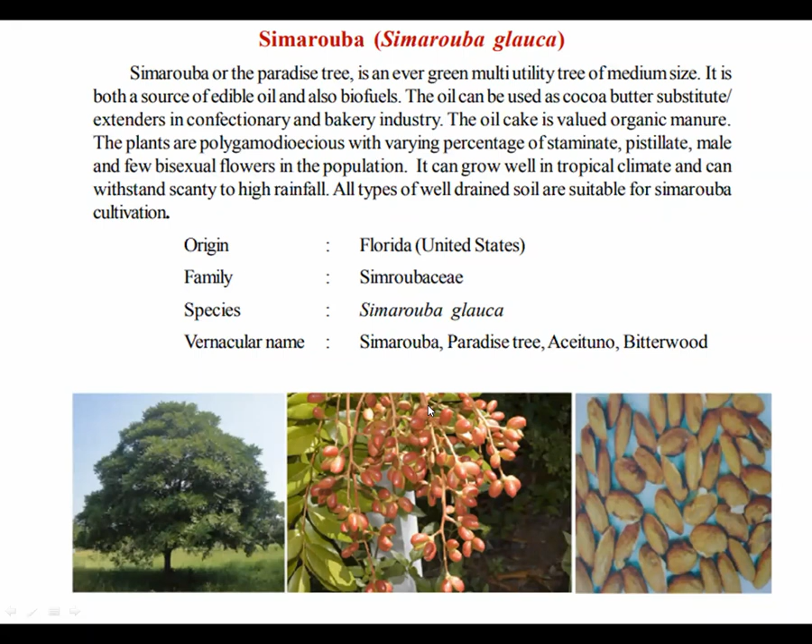Next is the Mahua, one of the important tree species in Central India, as it produces abundant delicious and nutritive flowers. This is used for edible purpose, either fresh or dried and stored for an indefinite period. It is fast growing, with a 20-meter height.

It is an evergreen tree cultivated in warm regions for its oil-rich seeds. Its oil is used by tribals as a vegetable butter. In addition, it is used in skincare products, soap, detergent, etc. It serves as an important fuel oil, hence a good source of biodiesel. The seed cake is used as manure. The flowers are used to produce an alcoholic drink in several parts of India.

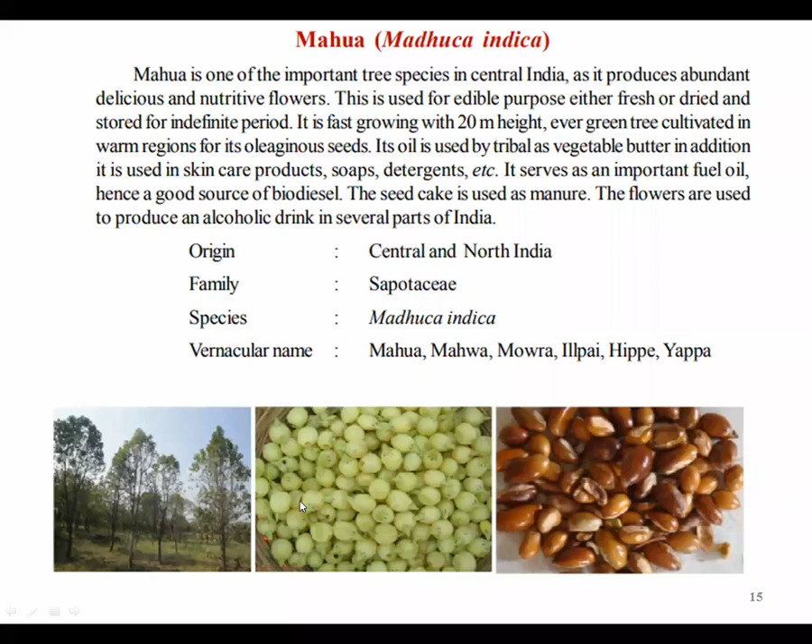Origin: Central and North India. Family: Sapotaceae. Species: Madhuca indica. Vernacular names: Mahua, Mowra, Illpai, Hippe in Kannada, and Yappa. And these are the trees, the fruits, and these are the seeds.

Kokum is an important minor fruit besides its seeds, which serve as an oil source for edible and non-edible applications. It is reported to have been imported from Zanzibar to India, and is found growing widely in the tropical rainforests of the Western Ghats in Konkan, Goa, Southern Karnataka, and Kerala. It is a slender, evergreen tree with drooping branches.

Kokum fruit is a promising industrial raw material for commercial exploitation due to its interesting chemical constituents. The seed yields a valuable edible fat known as kokum butter, used in chocolate and confectionery preparations, and also in manufacturing soap, candles, and ointments. It is an important source for biodiesel. Origin: Asia and Africa. Family: Clusioideae. Species: Garcinia indica. Vernacular name: Kokum.

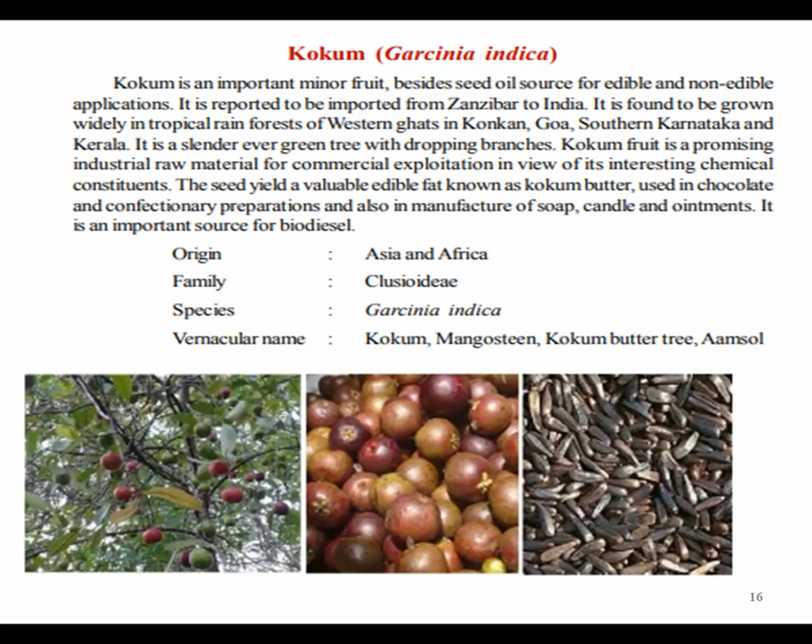This is the Aamsol kokum butter tree, and these are the tree's fruits, and these are the seeds.

Jojoba is also a tree, a potential tree-borne oilseed. It is grown in northern India, and its origin is North America. The family is Simmondsiaceae, species Simmondsia chinensis. Vernacular names include goat nut, coffee berry, quinine nut, wild hazel, and pig nut.

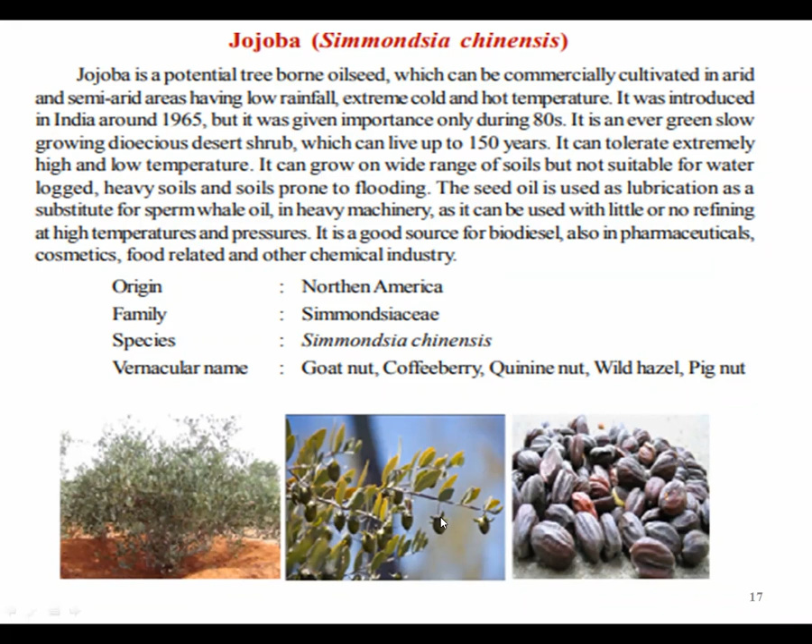This is the tree, and these are the fruits. The kernel has to be taken from this.

Neem is the most common in India; everyone knows it. It is one of the most valuable tree species found in India. It can grow on a wide range of soils, up to pH 10, making it suitable for every agro-climatic zone except high cold regions. It has a deep root system, so it does not compete with annual crops for soil moisture.

It is a multi-purpose tree which provides all the requirements of rural areas, namely timber, fuel wood, fodder, oil, fertilizer, pest repellents, etc. Neem is known for its azadirachtin content, and it has been commercially exploited in many products like medicine, manure, pesticide, insecticide, etc. Neem is also regarded for its environmental values.

Origin: India. Family: Meliaceae. Species: Azadirachta indica. Vernacular names: Neem, Bevu, Tamaka, Tamabin, Margosa tree, Veppu, Nimba, and others. And these are the trees, and these are the fruits and the seed kernel.

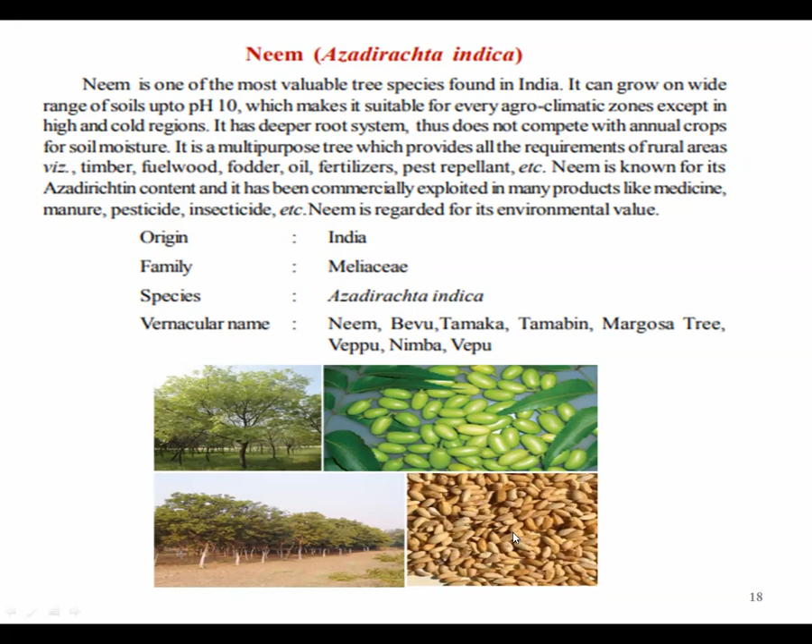Vegetable oils are the oils taken from all these seeds. Generally, these oils are removed from the kernels, sometimes with the shell and sometimes without, and they are crushed and put in the expeller, where with high pressure the oil is removed. Those are called vegetable oils. Next, properties of vegetable oils.

Vegetable oils and fats are hydrophobic substances composed of fatty esters and glycerol, known as triglycerides. Carbon chain length and number of unsaturated bonds varies. Triglyceride has a molecular weight of 800 to 900, 4 times larger than typical diesel.

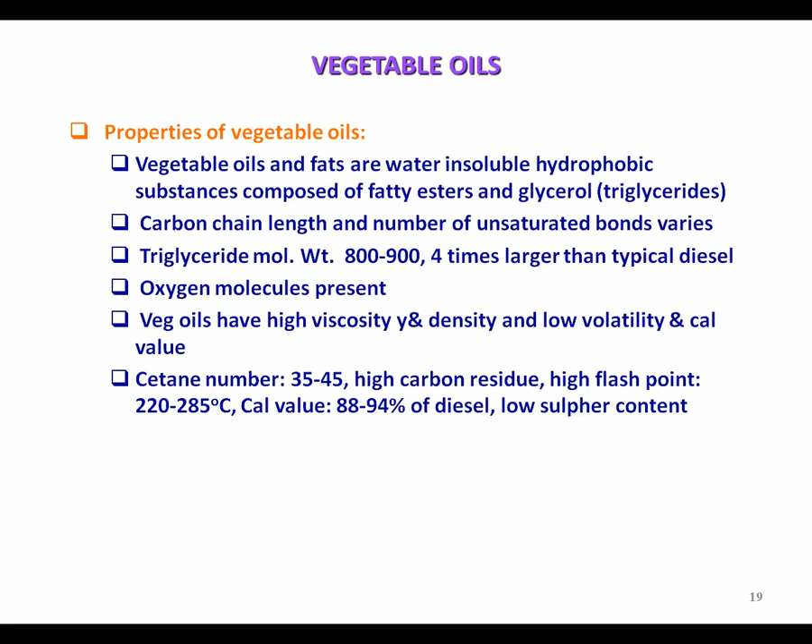Oxygen molecules are present in these vegetable oils. Vegetable oils have high viscosity and density, and low volatility and calorific value. Cetane number ranges from 35 to 45, with high carbon residue, high flash point of 220 to 285 degrees Celsius.

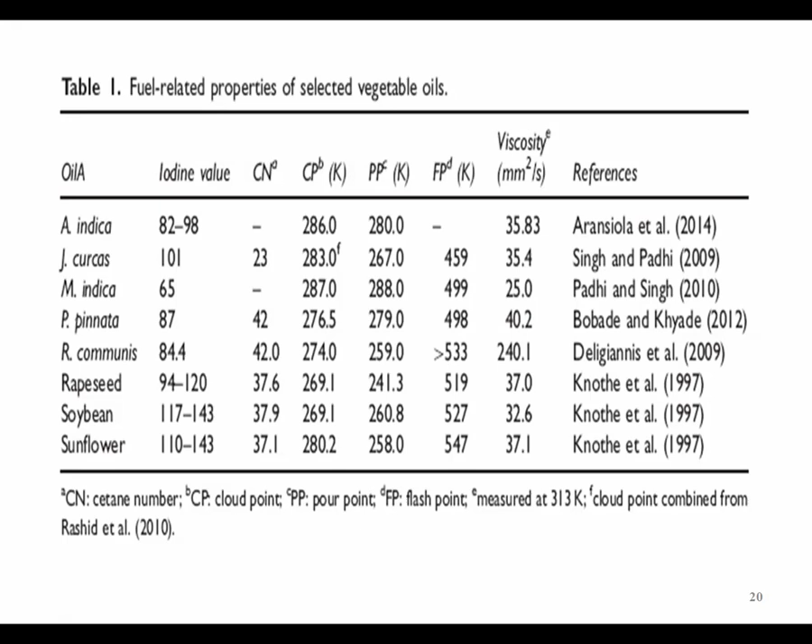If the free fatty acid content is 0, then it does not have the property of converting this vegetable oil into biodiesel. The more fatty acid composition it has, the more ability it has to convert into biodiesel. This is why it is significant.

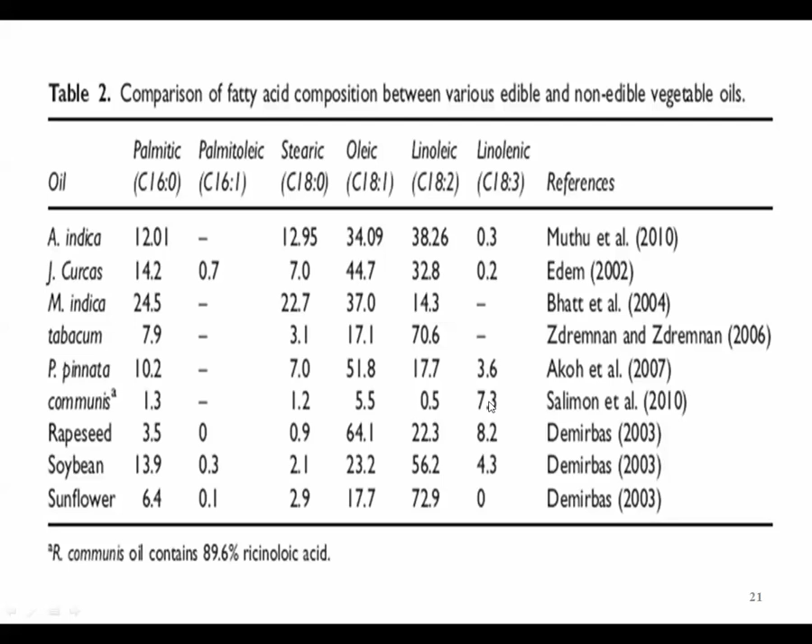Castor especially. The oil content in seeds and kernels of some non-edible plants.

Azadirachta indica, the neem tree, percentage of weight in the seed kernel - these are references. Oil content by weight percentage in the seed is 25 to 45, and in the kernel it's 30 to 50%. For polonga, it's 60 to 75, 50 to 70, and similarly for rubber.

You can see Madhuca indica and Jatropha have maximum oil content in the seed kernel, and the seed put together has an average of 30 percent of oils.

We can see mahua, drumstick, tobacco, karanja, castor, soap nut, jojoba, and all these are listed with their oil content in percentage by weight.

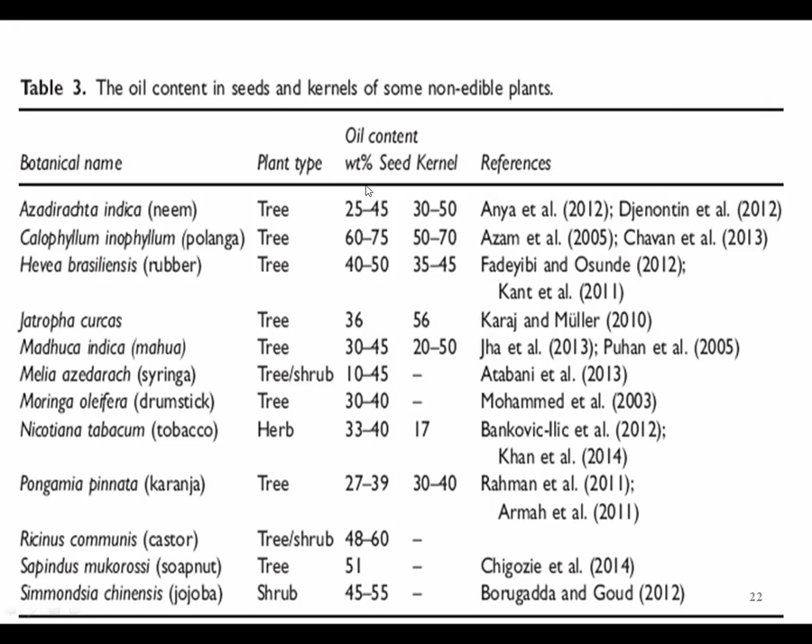The yields of various non-edible oil feedstocks. Neem yields 2,670 kg per hectare. These are seeds, talking of polonga, cardoon, rubber, and jatropha.

Drumstick, tobacco, karanja, castor, jojoba, tung, and for all these given here, among them polonga is 4,680, and karanja is of the order of 900 to 9,000 kgs per hectare. Note that 1 hectare is equal to nearly 2.2 to 2.5 acres.

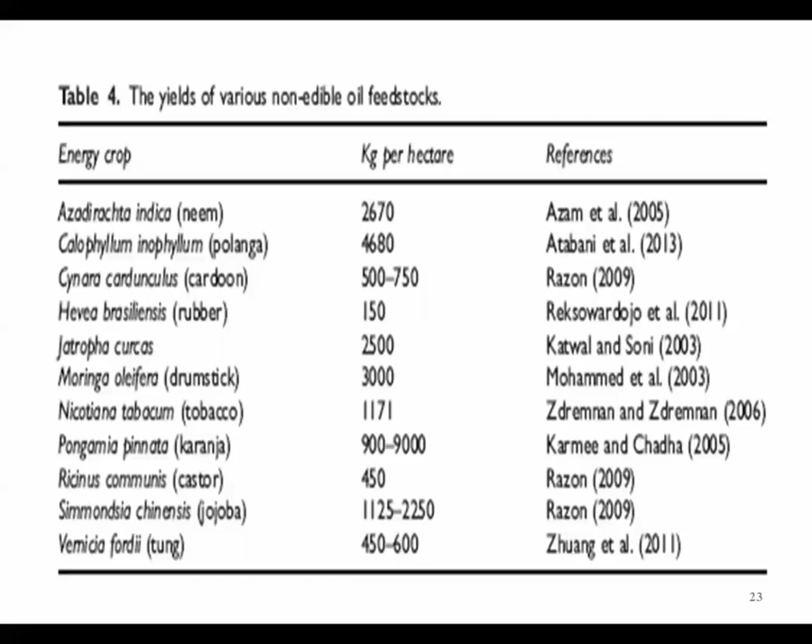Derivatives of non-edible oils as diesel fuels. Non-edible vegetable oils can be used as the fuels for diesel engines.

The primary problems associated with using these oils straight as alternative fuel in compression ignition engines are caused by very high fuel viscosity and low volatility. This leads to incomplete and improper combustion in combustion chambers. Either we have to modify the combustion chambers to suit this, or we have to modify the fuel.

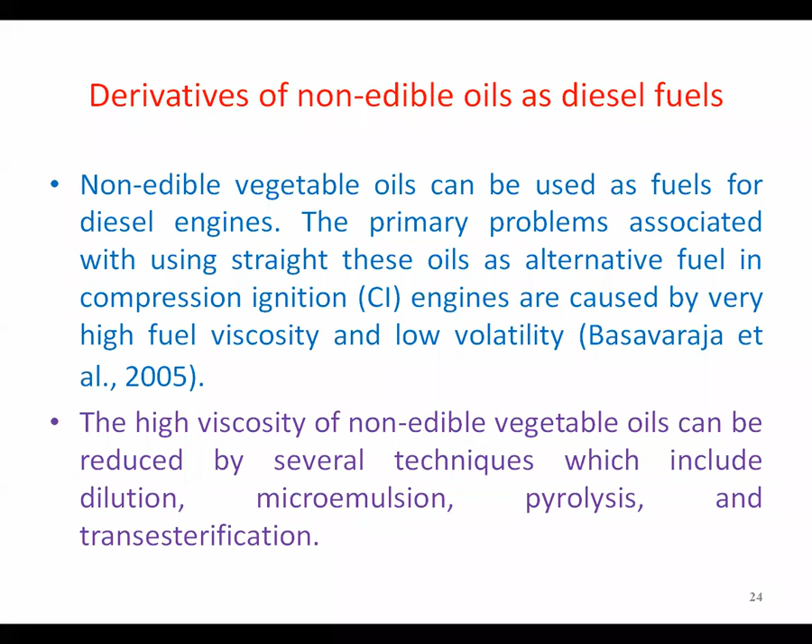The high viscosity of non-edible vegetable oils can be reduced by several techniques, which include dilution, microemulsion, pyrolysis, and transesterification. These are the different techniques of reducing viscosity of non-edible vegetable oils.

The first one is dilution of non-edible vegetable oils. Dilution means taking diesel and mixing 10% or 20% of the vegetable oil directly with the diesel. This dilutes the vegetable oil, and hardly there is a change in the properties of the diesel.

The oil-diesel fuel blend is a simple way to reduce the viscosity of non-edible vegetable oil. This method does not require any chemical process; just mixing is all that needs to be done.

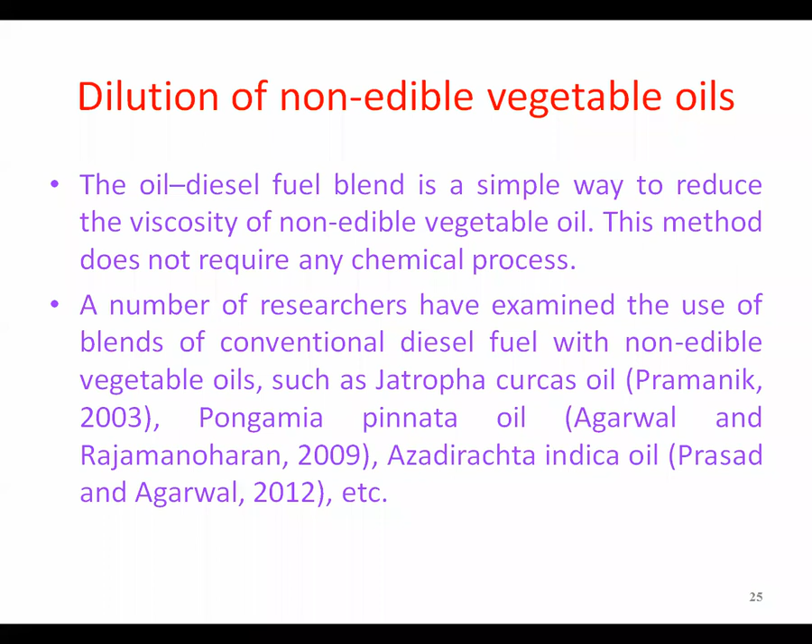A number of researchers have examined the use of blends of conventional diesel fuel with non-edible vegetable oils such as jatropha, karanja oil, Pongamia pinnata oil, and azadirachta indica oil, etc.

Using microemulsions for non-edible vegetable oils. Microemulsions are transparent, thermodynamically stable colloidal dispersions in which the diameter of the dispersed phase particles is less than one-quarter of the wavelength of visible light.

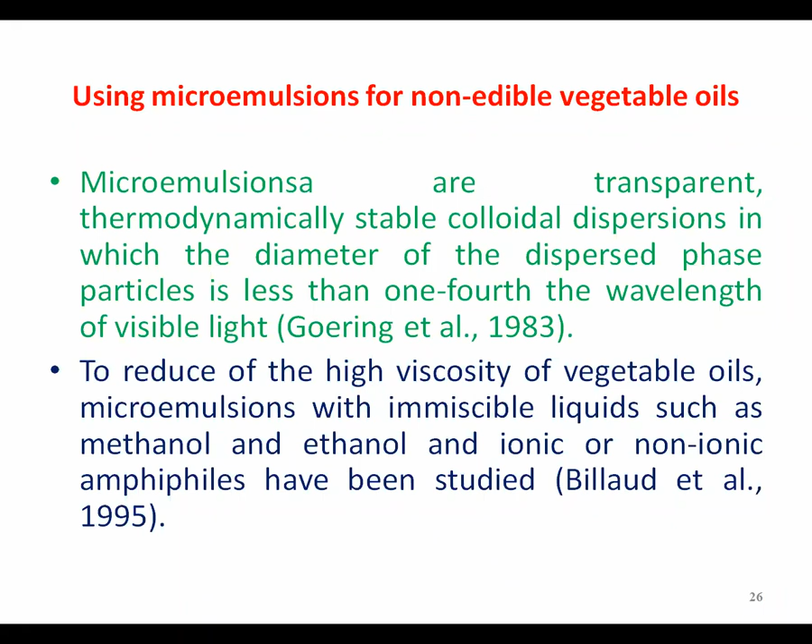To reduce the viscosity of vegetable oils, microemulsions with immiscible liquids such as methanol and ethanol, and ionic or non-ionic amphiphiles, have been studied. They take the vegetable oil and the methanol or ethanol and mix them thoroughly. This forms an emulsion, called a microemulsion.

Liquid fuels and biodiesel from non-edible vegetable oils via pyrolysis. Pyrolysis is a process of heating the oil to a certain temperature, breaking the constituent molecules, and removing fatty acids from it.

Conversion of vegetable oils using pyrolysis type reactions presents a promising option for the production of biodiesel fuel. Pyrolysis is the conversion of one substance into another by means of heat, or by heat with the aid of a catalyst.

Thermal decomposition of the triglycerides produces compounds of the classes including alkenes, alkadienes, aromatics, and carboxylic acids. Different types of vegetable oils produce large differences in the composition of thermally decomposed oil.

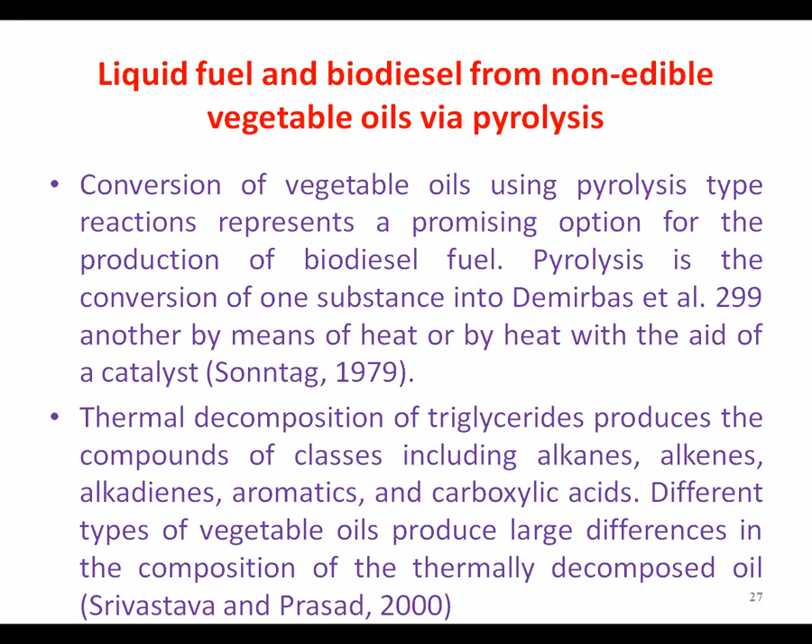Biodiesel via transesterification from non-edible vegetable oils. This is one of the most popular methods of producing biodiesel. Transesterification is a chemical reaction between a triglyceride and an alcohol.

Most commonly methanol or ethanol, in the presence of a catalyst, consists of a sequence of three consecutive reversible reactions where triglycerides are converted into diglycerides, and then diglycerides are converted into monoglycerides, followed by the conversion of monoglycerides to glycerol. In each step, an ester is produced, and thus three ester molecules are produced from one molecule of triglyceride. If one molecule of triglyceride is taken up, three molecules of ester are produced - that is, the biodiesel.

Ethanol is the preferred alcohol in the transesterification process compared to methanol because it is derived from agricultural products, is renewable, and is biologically less objectionable in the environment. However, methanol is preferable because of its low cost and its physical and chemical advantages as a polar and the shortest chain alcohol.

Triglycerides are esters of long chain carboxylic acids combined with glycerol. The carboxylic acid, R-COOH, can be converted into the methyl ester by the action of a transesterification agent.

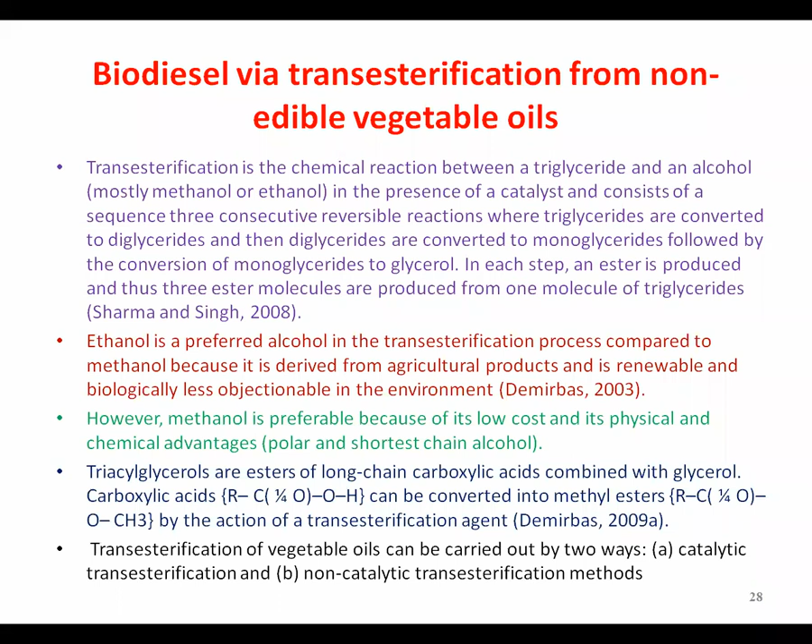Catalytic transesterification method: in this one, one mole of vegetable oil and three moles of alcohol are taken and heated at around 60 to 65 degrees Celsius for about 1 to 1.5 hours, depending on the free fatty acid content in the oil, along with a catalyst. This is called the catalytic transesterification method.

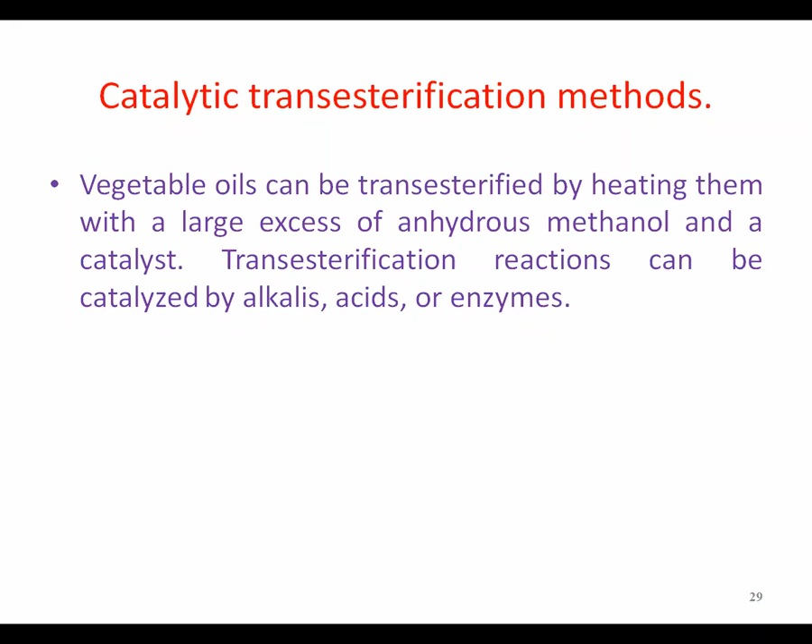Vegetable oils can be transesterified by heating them with a large excess of anhydrous methanol and a catalyst. Transesterification reactions can be catalyzed by the use of alkalis, acids, and enzymes.

Comparison of various methanolic transesterification methods: in the acid or alkali catalytic process, the reaction temperature is of the order of 303 to 338 Kelvin, and the reaction time taken is from 60 to 360 minutes.

Boron trifluoride, methanol, sodium methoxide catalyzed, non-catalytic supercritical methanol, and catalytic supercritical methanol methods. For the first three, reaction temperature is of the order of 300, while for others it is 523 to 573. Reaction time reduces for supercritical methanol to 6 to 12 minutes, and for catalytic supercritical methanol it is 0.5 to 1.5 minutes, meaning conversion becomes much easier with the supercritical methanol process.

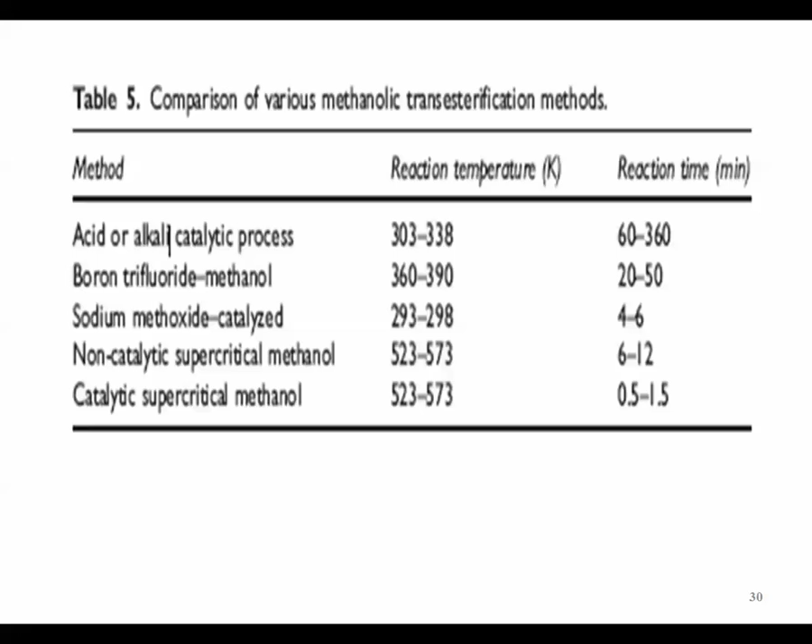Because this is a continuous process, we can do it, but with catalytic methods we cannot do it continuously—it takes nearly 1.5 to 2 hours for conversion.

Non-catalytic transesterification methods: there are two basic routes to produce biodiesel by non-catalyzed transesterification—the BIOX co-solvent process and the supercritical alcohol process. BIOX is named after the scientist who invented this process, where oil is converted to biodiesel using a co-solvent.

The BIOX co-solvent process uses either tetrahydrofuran (THF) or methyl tert-butyl ether as a co-solvent to generate a one-phase system. The result is a fast reaction, on the order of 5 minutes, with no catalytic residues in either the ester or glycerol phase. THF co-solvent is chosen partly because its boiling point is close to that of methanol, and this system requires a relatively low operating temperature.

For the majority of laboratory cases, the catalytic type is used instead of the non-catalytic type. We use a 1.5 to 2 liter flask with a three-way mouth, and a glass vessel where we put all the constituents and apply heat. For laboratory purposes, this is the most suitable way of making biodiesel.

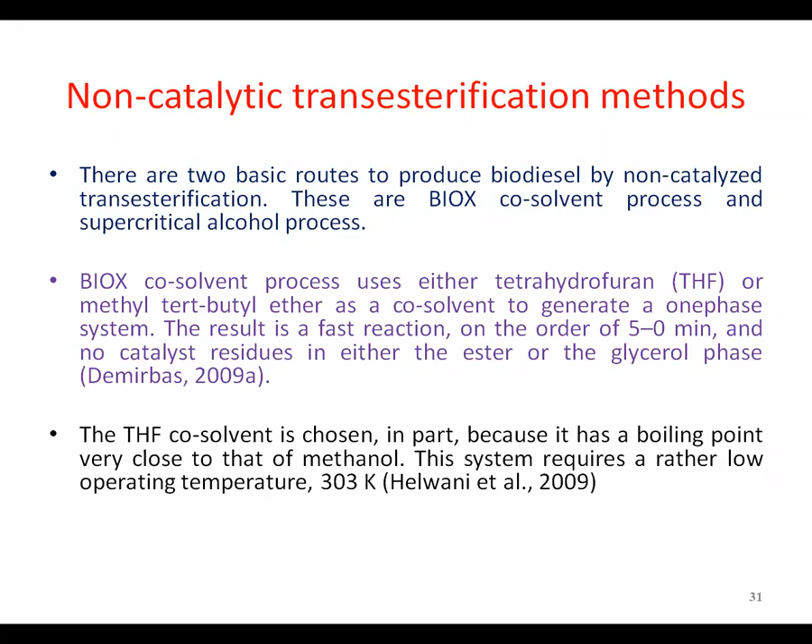Summary of catalytic transesterification of some selected non-edible oils. Catalysts used include potassium hydroxide (KOH), sodium hydroxide, pretreatment acid, Pseudomonas cepacia, CH3ONa, pretreatment, HCl, NaOCH3, KOH, and others, applied to non-edible oils like castor, karanja, and jatropha, each combined with a respective catalyst. The percentage of catalyst ranges from about 1 to 1.5%, except for the last case, and the temperature ranges are 333, 338, 338.

We heat it at this temperature, for example with castor oil and 1.5% KOH. Reaction times are 10 minutes, 3 hours, 1 hour, and 1 hour. Percentage yield of biodiesel is shown as 80.1%, 97%, 97.6%, and 98%, which are very good yields. This is why the catalytic transesterification process is most preferred in laboratories.

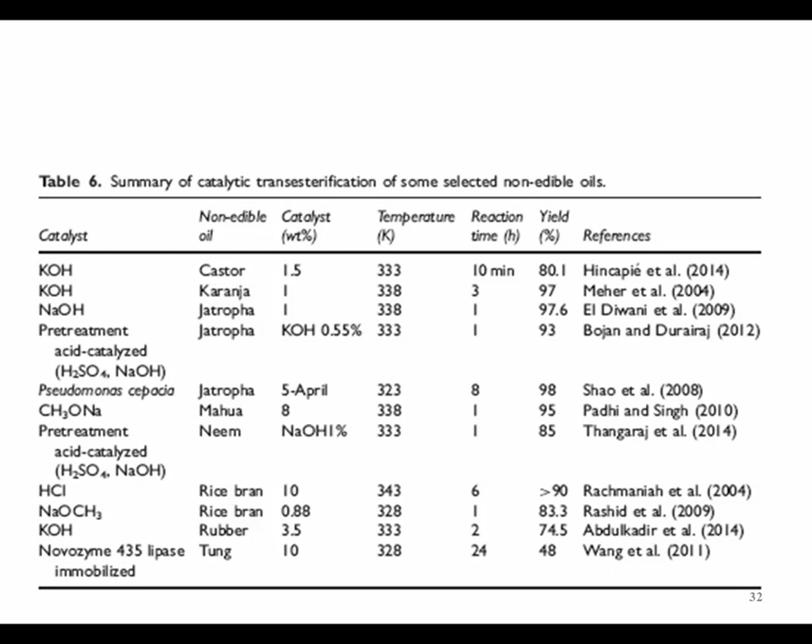Comparison between the catalytic methanol method and the SCM (supercritical methanol) method for producing biodiesel from vegetable oils by transesterification. Methylating agent is methanol in both; catalyst is alkali—NaOH or KOH—for catalytic method, none for SCM. Reaction temperature is 303 to 338 versus 523 to 573. Reaction pressure is 0.1 megapascal versus 10 to 25. Reaction time is 60 to 360 minutes versus 7 to 15 minutes. Methyl ester yield is 96% versus 98%. For purification, removal includes methanol, catalyst, glycerol, and soaps in the catalytic method, versus methanol, methyl esters, free fatty acids, methyl esters and saponified products, and water in SCM. Smell differs too—soap smell from exhaust versus sweet smelling.

This is the comparison with respect to temperature, pressure, time, yield, and catalyst used between catalytic and supercritical methods. Among them, the supercritical method is most important, because if you put vegetable oil directly in a vehicle system, biodiesel must be available in the form of continuous supply.

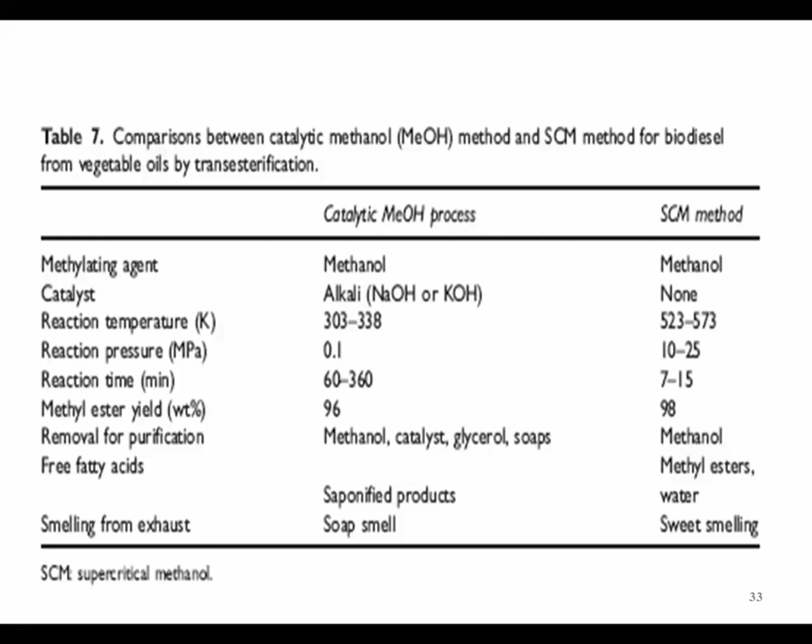ASTM standards specify maximum allowed quantities in diesel and biodiesel. Standard diesel is ASTM D975, and biodiesel is ASTM D6751. If interested, you can refer to these ASTM standards—D975 for diesel and D6751 for biodiesel. Composition includes HC C10 to C21, and FAME C12 to C22, with kinematic viscosity measured in millimeters squared per second.

The viscosity at 313 Kelvin is 1.9 to 4.1 centistokes, actually up to 6. Specific gravity is 0.85 to 0.88. Flash point values are 333, 353, 373, 443.

You can see that the flash point temperature of the biodiesel is even higher than given in the standards, meaning more flash point. The cloud point is 258, 278, of the same order.

Pour point is 238, 258, 258, 289, and water percentage is 0.05, 0.05, the same quantity. Carbon content is 87, 77, less in the biodiesel.

Hydrogen is about 13, 12 - this is from the ultimate analysis given. Oxygen is 0% in diesel versus 11% in the biodiesel.

This oxygen quantity is very important in the combustion process, because along with the biodiesel, this oxygen is available in the form of the oil itself. Inbuilt oxygen is available in the fuel by 10 to 11%, and the reaction becomes very fast. The catching of fire, the beginning of combustion, takes much quicker than diesel at the beginning, because inbuilt oxygen is available in the fuel.

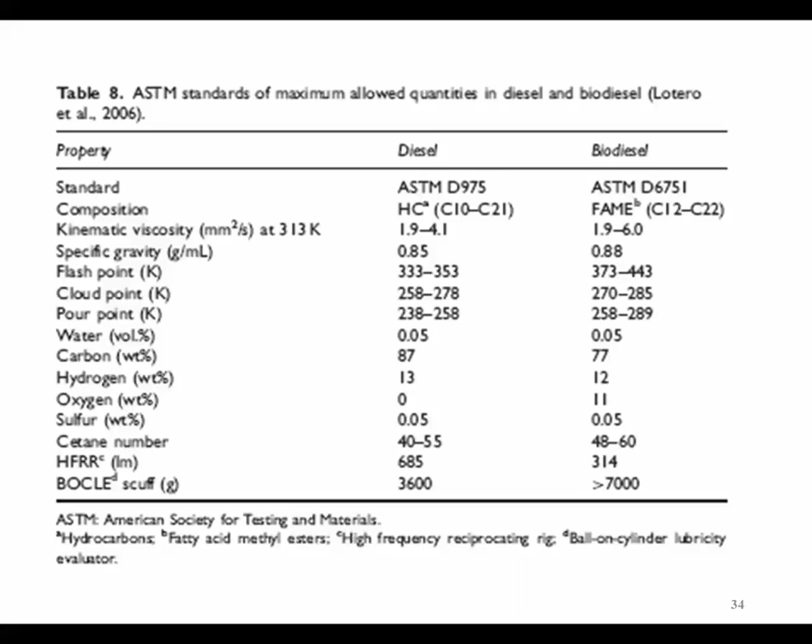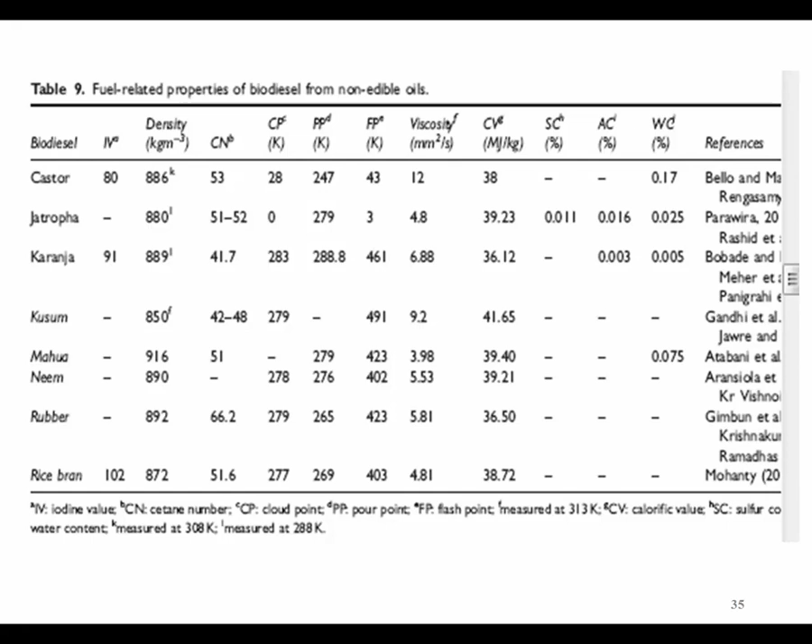After that, upgradation of the fuel property takes place. Fuel property upgradation is number one - the upgradation itself is in viscosity. The viscosity comes very close to that of diesel, making it possible to use biodiesel directly in combustion chambers.

Now so far this is a review of the literature we have done. In our college, we have a wonderful laboratory for internal combustion engines and biofuels, where we conduct a lot of experiments. One of the experiments I conducted, I want to present the values for the young participants.

For the experimental work, we used the following engine specification: Kirloskar AV1 engine, 4-stroke compression ignition, constant speed, vertical water cooled, naturally aspirated diesel engine, single cylinder, bore 80 mm dia, stroke 110 mm, swept volume 533 cc, compression ratio 16.5, rated output 3.68 kilowatt at 1500 rpm.

This is a 5 HP engine. Injection nozzle: MICO-BOSCH 3-hole nozzle, fuel injection pressure 150 bar absolute, injection timing 27 degrees before top dead center. Combustion chamber: hemispherical open combustion chamber. Inlet valve opens at 4.5 degrees before TDC, closes at 35.5 degrees after TDC. Exhaust valve opens 35.5 degrees before TDC, closes 4.5 degrees after TDC.

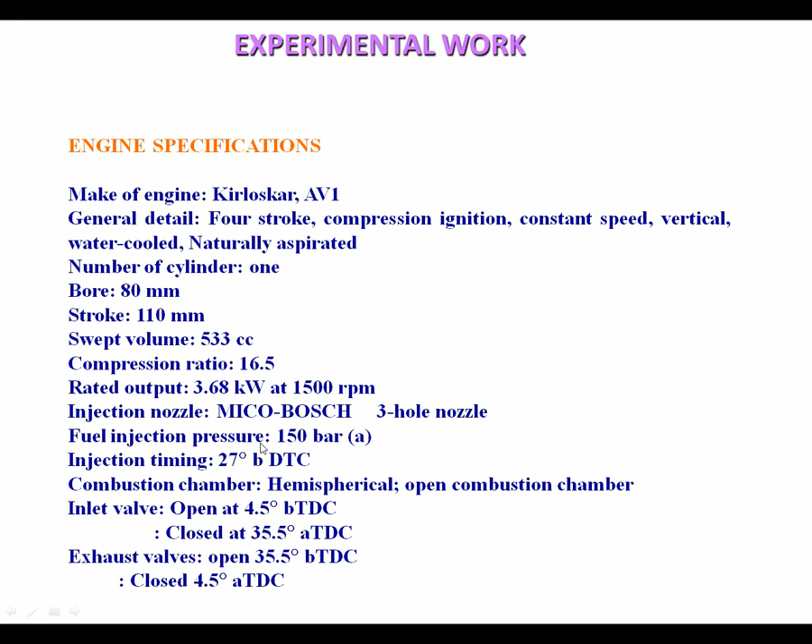Dynamometer: SAJ Froude AG series eddy current dynamometer, bidirectional, water cooled, with a load cell for torque and a magnetic pickup for speed measurement. Smoke meter: Neptune Equipment Private Limited, Ahmedabad make, measuring light absorption by particles in Bosch units. Exhaust gas analyzer: SAJ Crypton make, dry basis, non-dispersive infrared gas, measuring unburnt hydrocarbon and carbon monoxide.

We conducted this experiment around the year 2005, when these instruments were available. Now the exhaust gas analyzer in our laboratory has been well modified, and we purchased it at a cost of 15 lakhs.

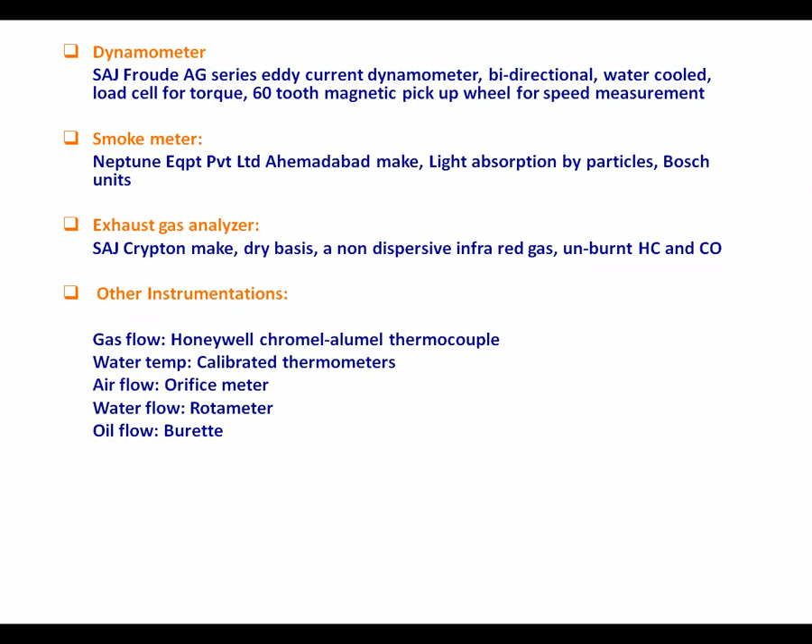We have also presented an AVL 5 gas analyzer. Other instrumentation includes gas flow, water temperature, air flow, water flow, and oil flow measurements, using thermocouples, orifice meter, rotameter, and burette, etc.

Experimental program: variable load tests are conducted at 0.37, 0.92, 1.48, 2.03, 2.58, 3.13, and 3.68 kilowatt at 1500 rpm, with injector pressure 150 bar and water outlet temperature of 60 degrees Celsius. Oil and its blends are heated to the required temperature because heating reduces the viscosity of the oil. The engine was sufficiently warmed up and stabilized before taking all readings.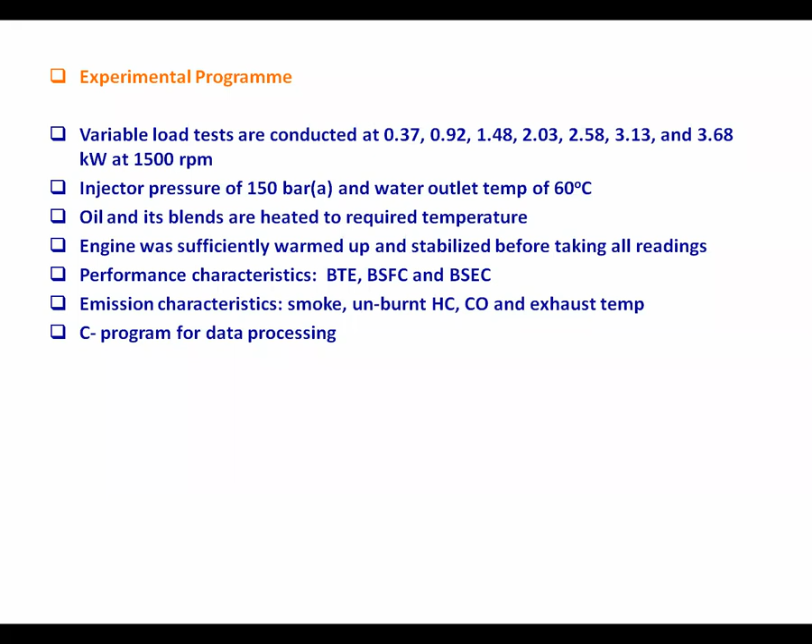Performance characteristics studied: brake thermal efficiency, brake specific fuel consumption, and brake specific energy consumption. Emission characteristics studied in terms of smoke, unburnt hydrocarbon, carbon monoxide, and exhaust temperature, with C programming used for data processing.

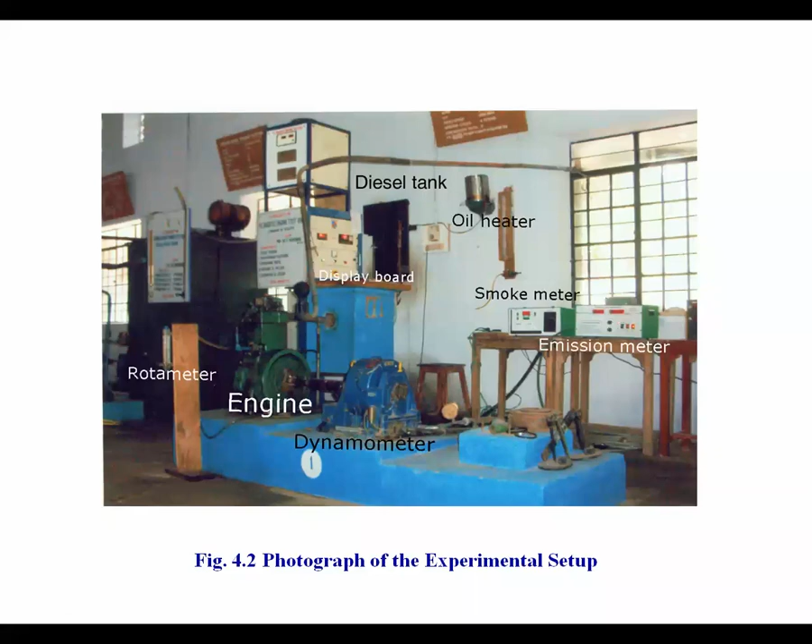Now at present we have this test engine, which is not 3.8 but 7.5 HP, and within it we have a 5 gas analyzer. This is a close view of the 5 gas analyzer, and the whole setup is available in our laboratory.

If any young scientist wants to work and conduct experiments on this IC engine, single cylinder or multi-cylinder, you can contact the Head of the Department of Mechanical Engineering. It is most useful for them for conducting R&D activities in our laboratory.

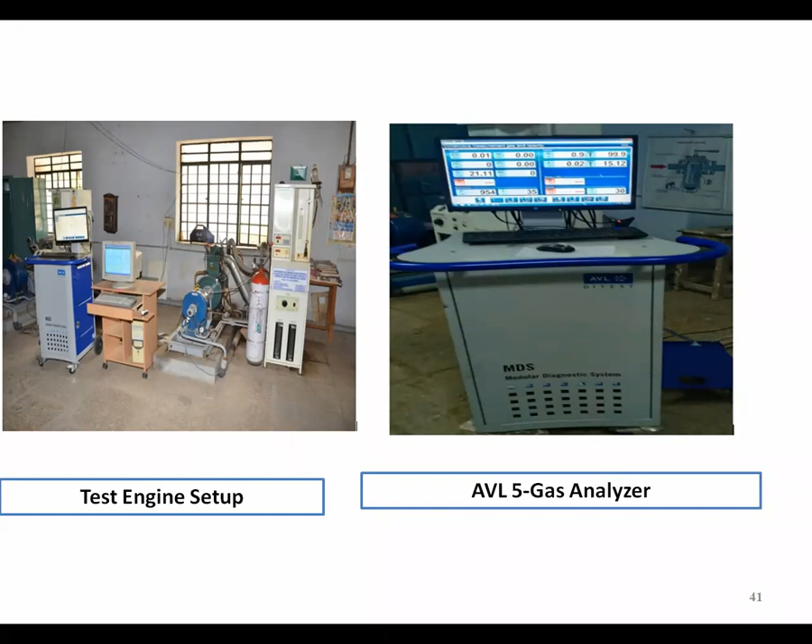Investigations on different vegetable oils in the test engine: first we are taking investigations with vegetable oils, not biodiesel, directly vegetable oils. Notations used for the oils: jatropha oil, Pongamia oil, Deccan hemp oil, tobacco seed oil, and bitter almond oil.

The better performing concentration of oil or blends is based on maximum brake thermal efficiency, minimum brake specific fuel consumption, minimum brake specific energy consumption, minimum CO, unburnt hydrocarbon, and exhaust temperature.

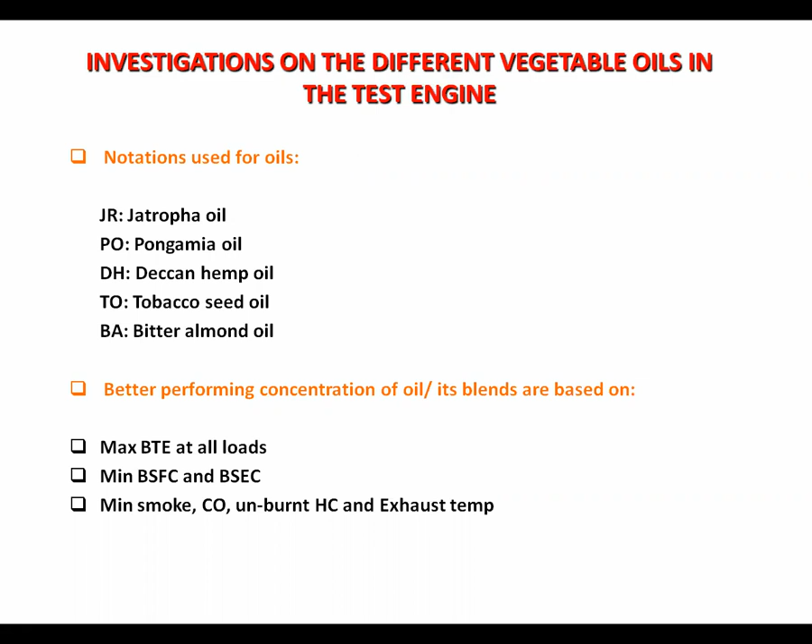Comparison of combustion characteristics of vegetable oils in our experiment: jatropha, Pongamia, Deccan hemp, tobacco seed, bitter almond, and diesel are used. Here we have density and viscosity values. We can see the viscosity of the oils is nearly 10 to 12 times higher than that of diesel.

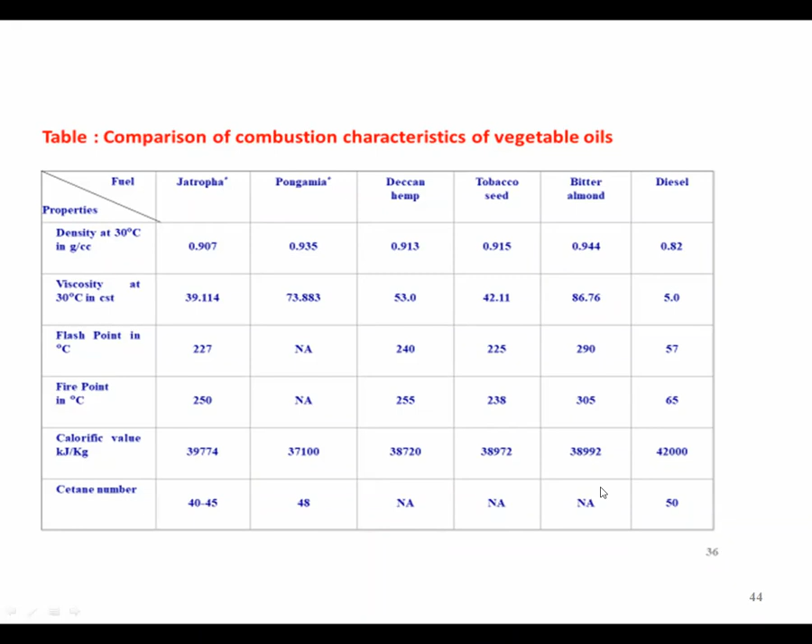Flash point is of the order of 200 to 250, and fire point is of the order of 250. The calorific value is less than that of diesel, as expected. The cetane number is of the order of 40 to 45, 48 for some oils, while for others it is not applicable or not calculated, as compared to diesel.

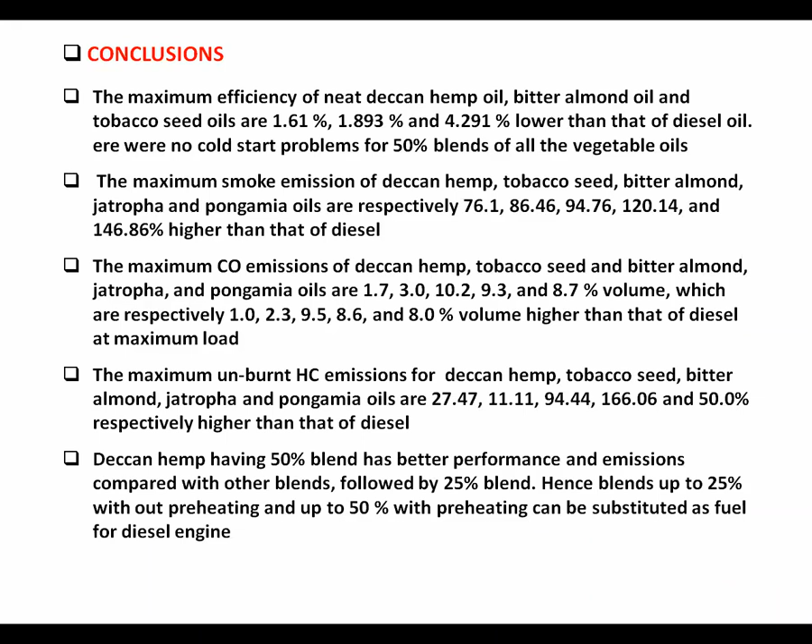From the experiment, it is observed that all these vegetable oils actually produce the required amount of power. But the problem with these oils is that they emit more smoke and more carbon monoxide, and NOx emissions are higher because these are raw oils. These raw oils produce more emissions, but with a little lower thermal efficiency than that of diesel.

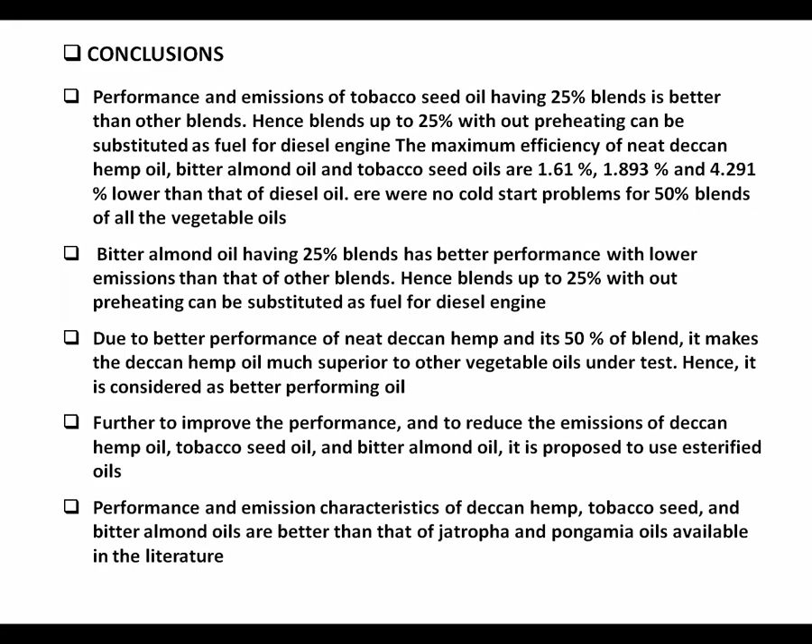Investigations on esterified oil: Deccan hemp, tobacco oil, and bitter almond oils work with lower performance and higher emissions in raw form, but esterification reduces emissions and improves performance. Methyl esters of Deccan hemp, methyl esters of tobacco seed oil, and methyl ester of bitter almond oil were prepared in the laboratory.

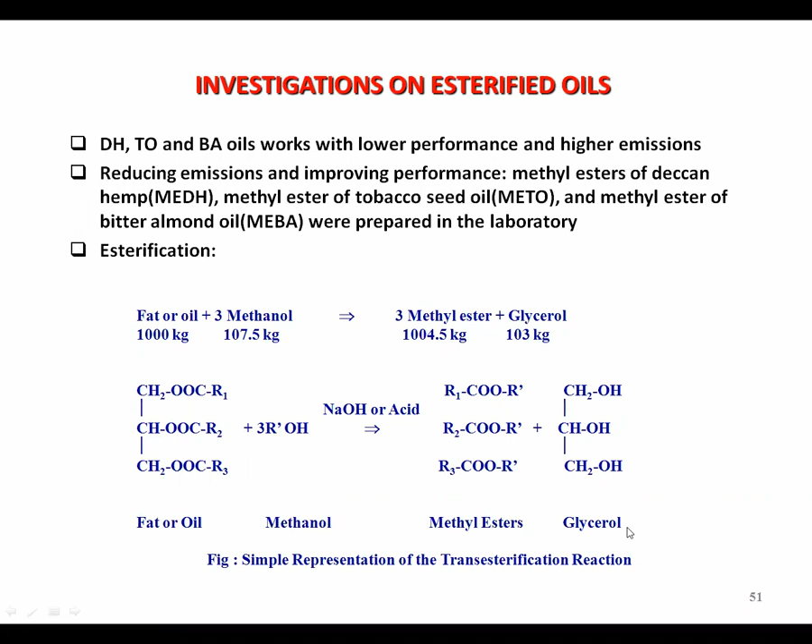This esterification is done in the laboratory. The fat or oil, 1000 kg, 1 mole, reacts with 3 moles of methanol to produce the methyl ester biodiesel, and 1 mole of glycerol is formed. This chemical reaction involves methanol, methyl ester, and glycerol - a simple representation of the transesterification reaction.

Properties of Deccan hemp, tobacco seed, and bitter almond oil methyl esters in comparison with diesel, neat oils, and other esters. The calorific value of diesel is 42,000. For Deccan hemp oil methyl ester biodiesel, there is a little improvement in calorific value compared to the Deccan hemp oil. For viscosity, diesel is 3.8, Deccan oil neat oil is 35.44, but methyl ester of Deccan oil is 4.82. Flash point is 45 for diesel, 255 for the oil, and 140 for the methyl ester biodiesel. Similarly, for all the oils under test, these values have been given.

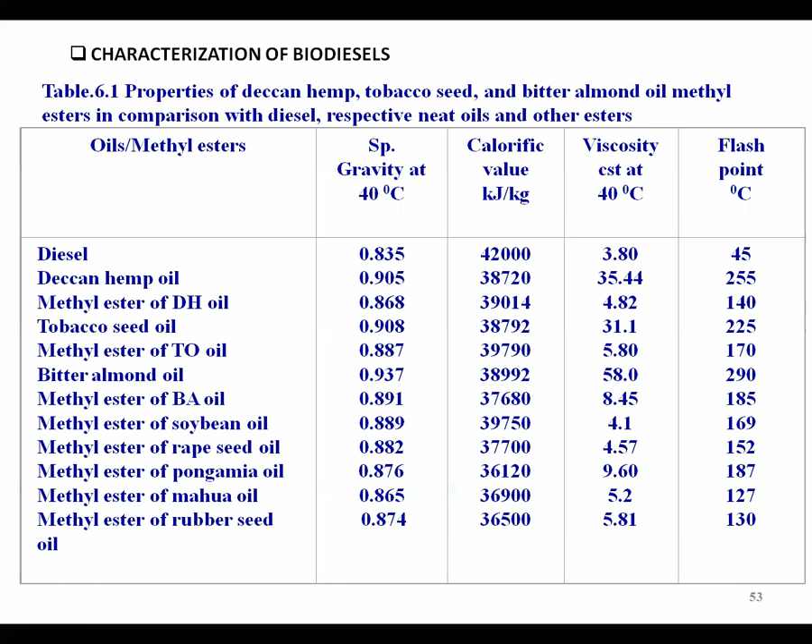Characterization of biodiesel - we have taken it up and gone through it. Then, very unfortunately, these are not displaying.

Performance and emission characteristics of the methyl esters of Deccan oil are compared with those of methyl esters of rubber seed oil and methyl ester of mahua oil, and found satisfactory.

Brake thermal efficiency, brake specific fuel consumption, and specific energy consumption of methyl ester of tobacco seed oil at rated load are well comparable with that of diesel. Smoke and unburnt hydrocarbons of METO oil at rated load are 11.4% lower and 22.22% lower than that of diesel. However, carbon monoxide emission is higher than that of diesel for the entire range of operation. Performance and emission characteristics of methyl ester of tobacco seed oil are well comparable with that of methyl esters of rubber seed oil and methyl esters of mahua oil.

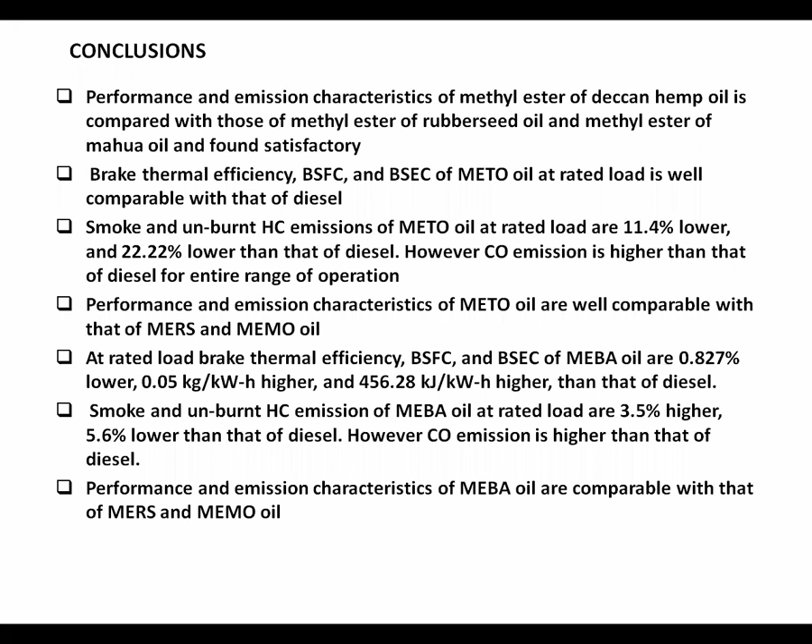In general, I want to state that because of this conversion into biodiesel, the performance of the diesel engine's thermal efficiency increases, and emissions are reduced. The only problem associated with biodiesel is that NOx emissions are high, because of two things: the inbuilt oxygen content in the biodiesel, and the higher temperature of the combustion chamber. Because of these two things, NOx emissions are higher, since NOx emission depends on the reaction temperature and the percentage of oxygen available during the combustion process.

Another way of improving the engine: modification of the oil is one option, and modification of the engine is another option. Modification of the oil means we convert it into biodiesel and run the engine on that. The other option is modification of the engine itself - how do we modify the engine? We convert this engine into a low heat rejection engine or semi-adiabatic engine. What does a semi-adiabatic engine mean?

LHR engine, let me discuss first, then later come to this discussion part of it. LHR engine is a semi-adiabatic engine.

What we do here is coat the combustion chamber, piston face, and valve faces with a ceramic coating. During combustion, the energy is actually stored inside or held up in the combustion chamber itself. It's locked inside the combustion chamber. Because of the higher temperature available in the combustion chamber, efficient combustion takes place.

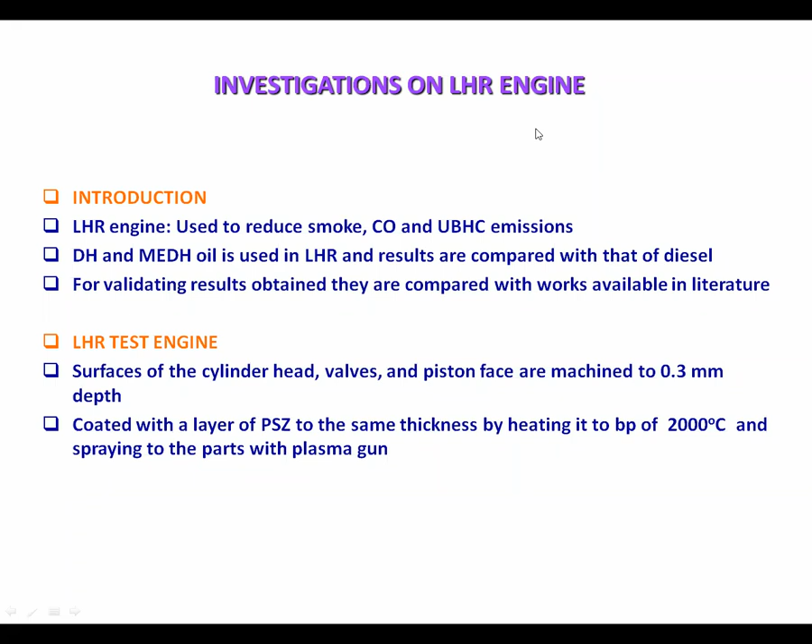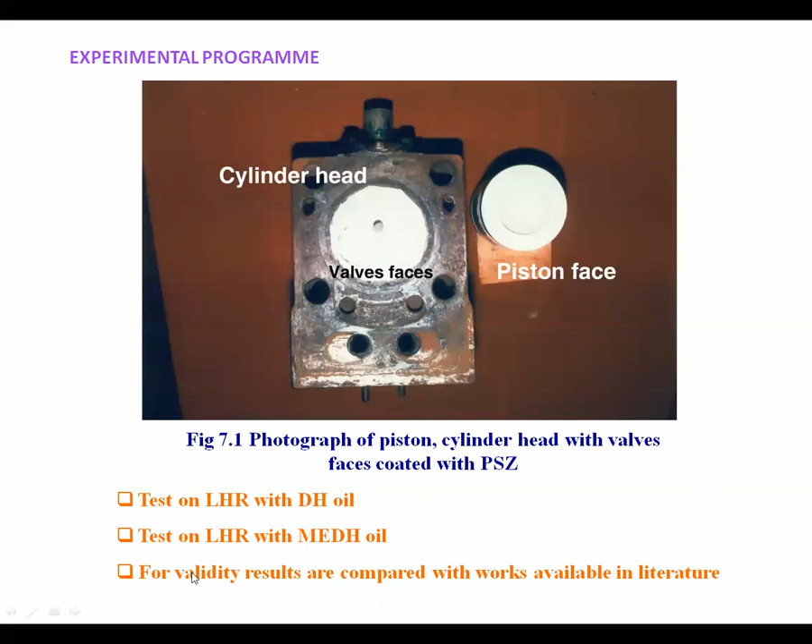Photograph of the piston, cylinder head, and valve faces coated with PSZ. Tests on the LHR engine with Deccan hemp oil, and tests on the LHR engine with methyl ester of Deccan hemp oil. For validity, results are compared with works available in the literature.

The conclusion for such engines is that a normal diesel engine is modified by insulating the piston face, cylinder head, and valve faces with PSZ using plasma spraying.

Brake thermal efficiency of the LHR engine with Deccan hemp oil as fuel is 5.657% higher than that of the standard diesel engine at rated load. Exhaust emissions like smoke, carbon monoxide, and unburnt hydrocarbon for Deccan hemp oil in the LHR engine at rated load are respectively 19.1% higher, 28.5% higher, and 61.11% lower than that of diesel in the normal engine.

Brake thermal efficiency of the LHR engine with methyl ester of Deccan hemp oil at rated load is 6.1% higher than that of diesel in the standard engine. Exhaust emissions like smoke, carbon monoxide, and unburnt hydrocarbon for methyl ester of Deccan hemp oil in the LHR engine at rated load are respectively 66%, 71%, and 88% lower than that of diesel in the normal engine.

Performance and emission characteristics of the LHR engine with Deccan hemp oil and methyl ester of Deccan hemp oil are well comparable with that of Jatropha. Volumetric efficiency of the LHR engine is lower than that of the normal diesel engine because of the higher temperature, which affects the density of the combustion products.

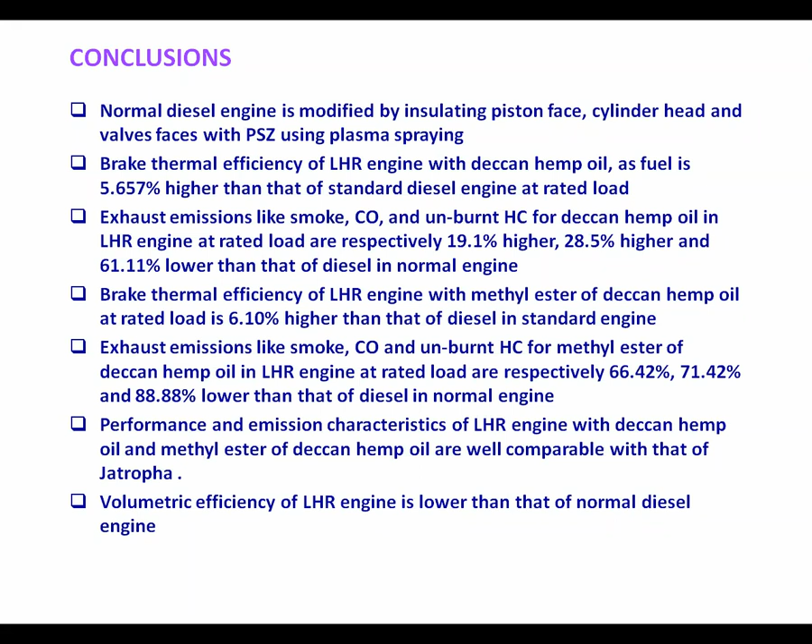Investigations on the dual fuel engine: here, either methanol or ethanol are used as the primary fuels, and Deccan hemp oil as a pilot fuel in the diesel engine. The results are compared with that of diesel used as pilot fuel. Further, the results are compared with similar work available in the literature for validity.

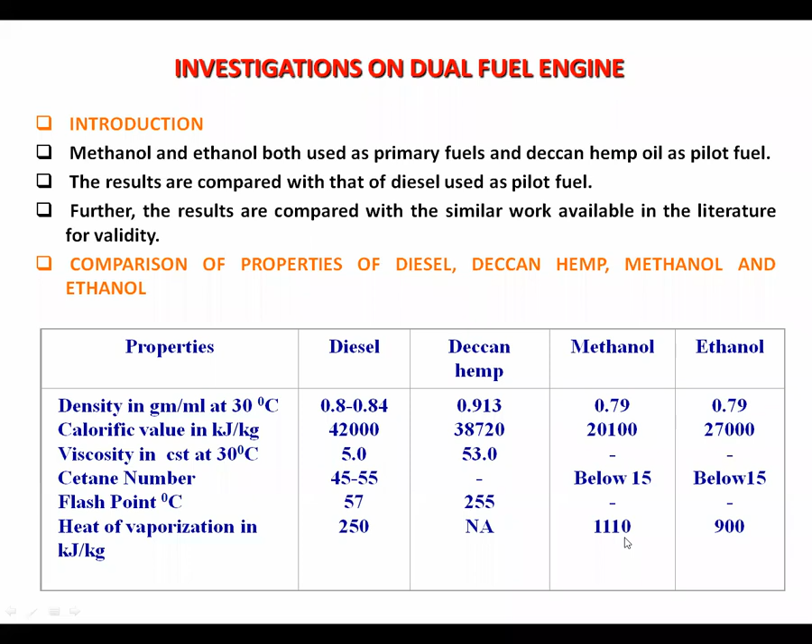Comparison of properties of diesel, Deccan hemp, methanol, and ethanol is given here. We can see the viscosity is 53, then methanol, then ethanol. Deccan hemp oil is used, not methyl ester of Deccan hemp oil. Viscosity, cetane number, flash point, and heat of vaporization in kilojoules per kg: ethanol is 900, and methanol is 1110.

The dual fuel engine is actually manufactured and modified in our laboratory itself. This is an intake manifold. Ethanol and methanol are injected directly using a carburetor used for the Hero Honda, and that experimental setup has been modified, and this experiment is conducted in our laboratory in our college.

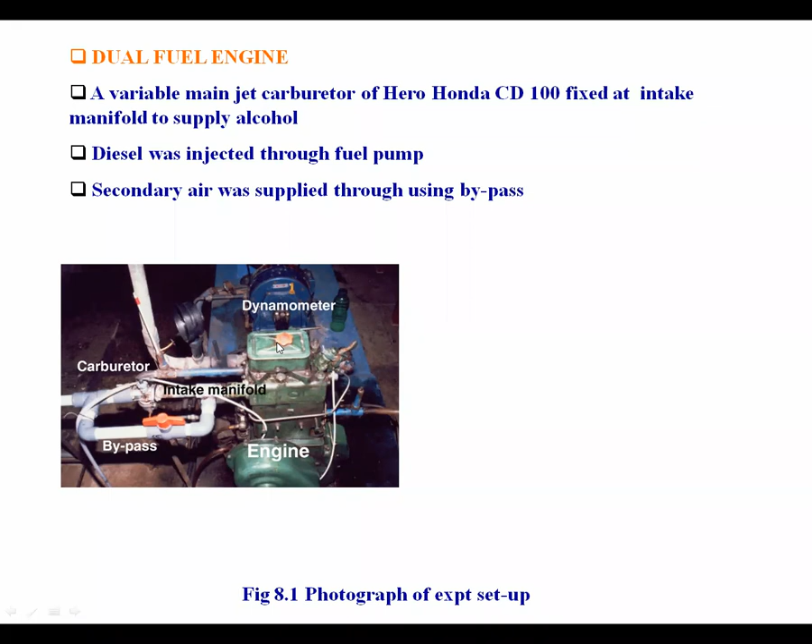Properties of Deccan hemp oil, methanol, and ethanol are compared with that of diesel. It is observed that the density, calorific value, and Cetane number of methanol and ethanol are lower, and heat of vaporization is higher than that of diesel.

The existing standard diesel engine is modified and converted into a dual fuel engine. Brake thermal efficiency increases with increase in the amount of methanol share for the Deccan hemp oil and diesel. The maximum thermal efficiency of the dual fuel engine with Deccan hemp oil as a pilot fuel is observed.

This is 29.64% against 31.82% for diesel, and this occurs at about 45% methanol energy share. Smoke emission reduces with increase in the methanol energy share. At maximum thermal efficiency condition, smoke emission for the Deccan hemp oil and diesel are reduced by 62 and 72% respectively than that of the neat oil.

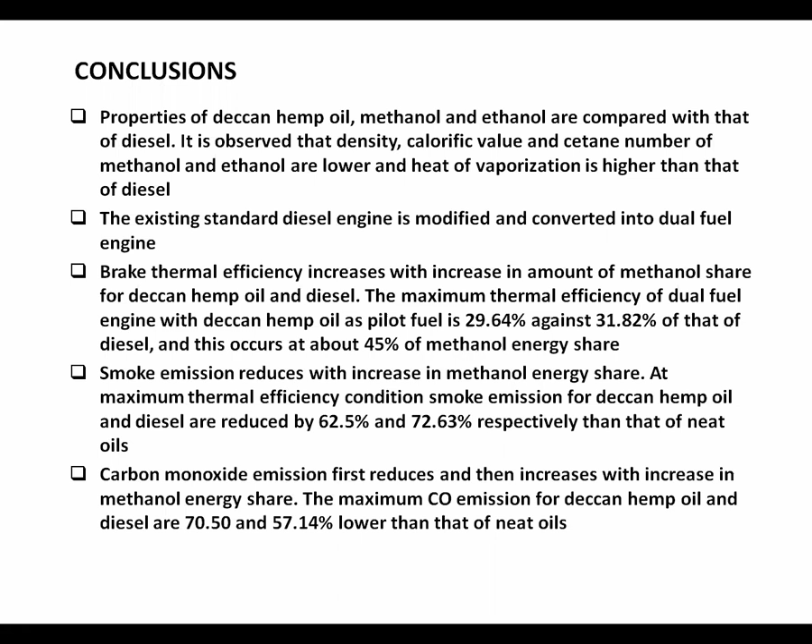Carbon monoxide emissions first reduce and then increase with increase in methanol energy share. Maximum CO emissions for Deccan hemp oil and diesel are 70 and 57% lower than that of the neat oils. Unburned hydrocarbon emissions and other losses are also reduced.

Nowadays, one more parameter is considered for analysis of engine combustion, called combustion characteristics. Generally, performance of an engine is measured with either brake thermal efficiency, specific fuel consumption, and emissions. These are called emission characteristics and performance characteristics.

Another is the combustion characteristics. Combustion characteristics are nothing but a theoretical prediction of the behavior of the engine, how it takes place, how pressure varies inside the combustion chamber, and it depends on that.

How the pressure is measured in the combustion chamber by putting a piezoelectric pressure transducer. The pressure inside the combustion is detected, and pressure versus crank angle diagram can be done using pressure and crank angle dimensions.

Then we can predict the temperature variation in the combustion chamber and percentage of fuel burnt in the combustion chamber. Then pressure rise, percentage of fuel burnt, and so many things can be determined, like heat release rate, because the heat release rate is directly proportional to the quantity of fuel burnt.

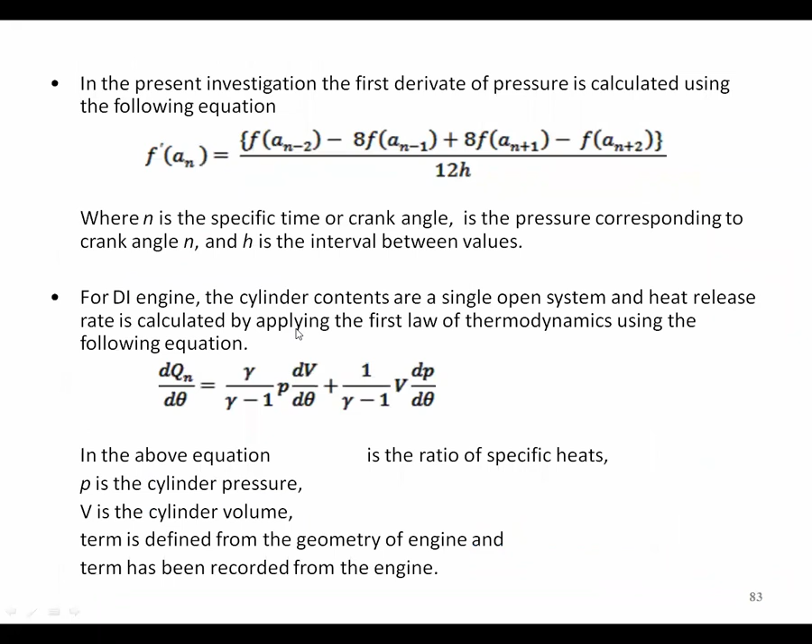Using the formula given previously, we can calculate the net heat release rate. This is the net heat release rate, from which we can predict how combustion is taking place inside the combustion chamber.

This is smoke emission, smoke versus brake power, for diesel, biodiesel, and biodiesel with 95% plus 5% ether, their effect is shown in this graph. For smoke emission, diesel is lower for all loads under test. Biodiesel is more; by adding ether, the emissions have been considerably reduced in smoke emission.

Then hydrocarbon emissions are very low by adding the ether.

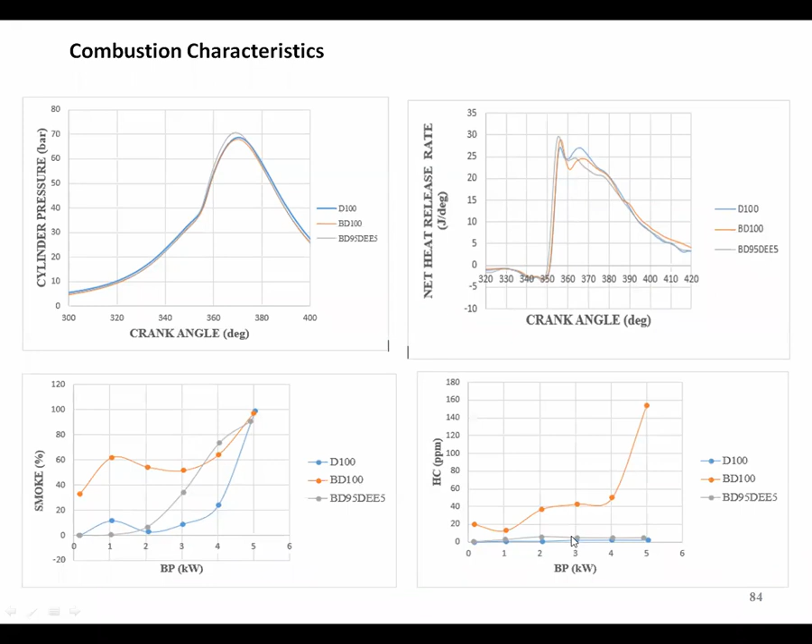And carbon monoxide - we can see that NOx emissions can be considerably reduced by adding the ether by 5%, and brake thermal efficiency is actually improved because the losses are reduced, and that supports complete and efficient combustion of the fuel in the combustion chamber. Ultimately, this increases brake thermal efficiency.

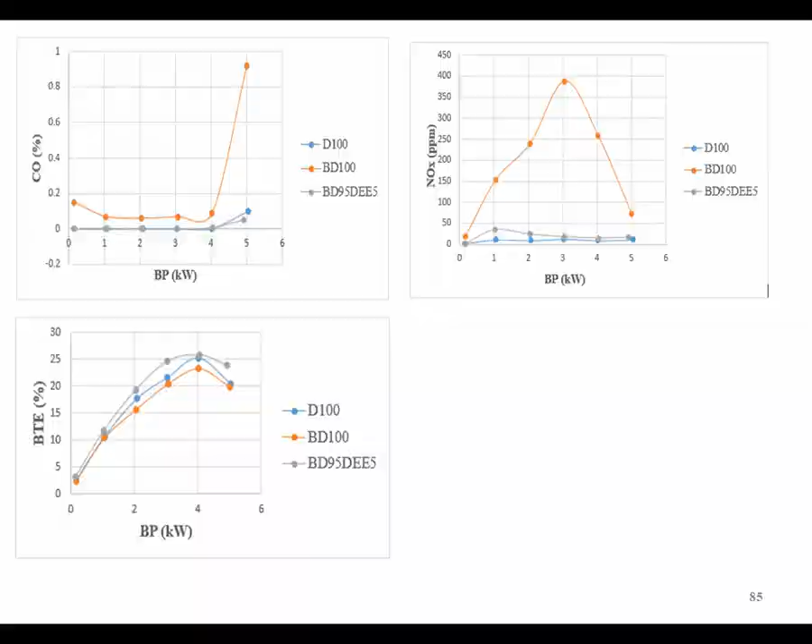The important conclusion of this seminar, or this slot of the lecture, is that edible plant oil fuels presently do not compete economically with petroleum-based fuels because they are more expensive. But due to the recent increase in petroleum prices and uncertainties concerning petroleum availability, there is a renewed interest in non-edible plant oil fuels for diesel engines.

Peanut oil was the first oil used in the diesel engine by Rudolf Diesel, as we know. At that time the oil cost was very high, and another major problem was that it was an edible oil. If edible oil is used for running a diesel engine, then there would be a shortage of food for mankind available on the planet.

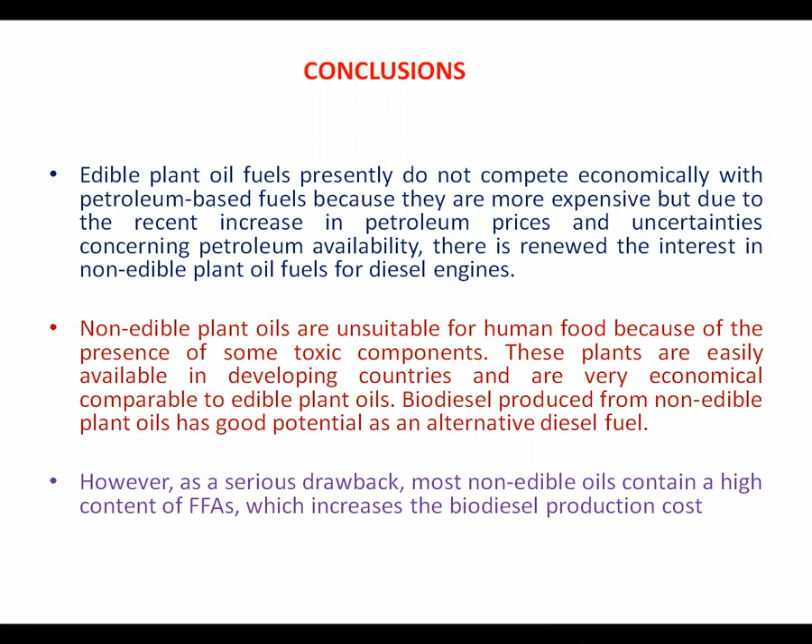I will conclude this session with the statement given by the Honorable Prime Minister. Thanks for your patience in hearing all this time.